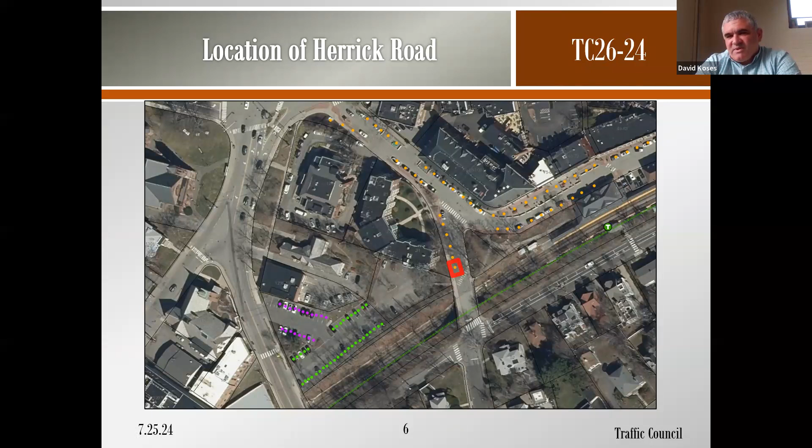The reason for its removal is a new building, which is almost complete and close to being ready to open. This is the building right here. You can see on this plan a driveway that now comes out to Herrick Road at the location where we have one parking meter located at that spot.

This is the location we're talking about. The driveway would be coming out this way from the construction site through here, and then exiting right here in this spot. That's where parking meter number 1413 is located, and we would need to remove that meter.

We did receive a letter from the fire department. In their letter, they write that as stated in the request filed with the council by Councilor Danberg, the Fire Prevention Bureau has determined in the interest of public safety that vehicular access for emergency vehicles from Herrick Road is a necessity if the building is to be occupied. To that end, such access cannot be achieved without the removal of one metered parking space on Herrick Road to provide the required curb cut opening. So that's the reason for the removal of the meter.

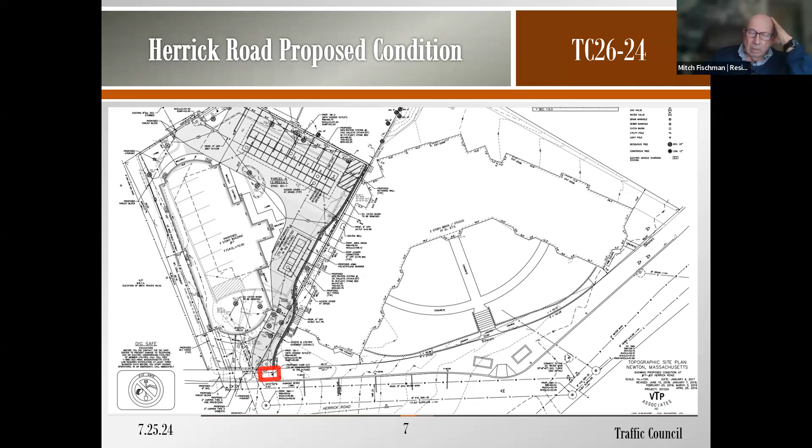And the curb cut—that's all been designed and approved, and all we're doing is getting rid of the parking space? Correct. Mitch, the site plan was approved as part of the special permit process. This project wended its way through city council over several iterations over a decade. I think you might have actually served at the time one of the earlier versions was approved. But the site plan approved the curb cut.

Of course, we would have to go through the DPW and engineering to get the curb cut approved, but it's already been vetted through the special permit process.

So Terry, would it be the developer that would be removing the trees? I guess we would have to remove one of these two meters and keep the other one there. I don't know about the utility pole or the street lamp, if it needs to be removed as well. The new curb, removal of the curbing to create access—all that's going to be done by the developer, right?

That is correct. All costs associated with the curb cut would be borne by the developer. That's correct.

So we have no objection, David, from people in that corner building? I have not received any objections to this item. I mean, all we're responsible for at traffic council is to vote to remove one meter. We're not in charge of really voting on anything else.

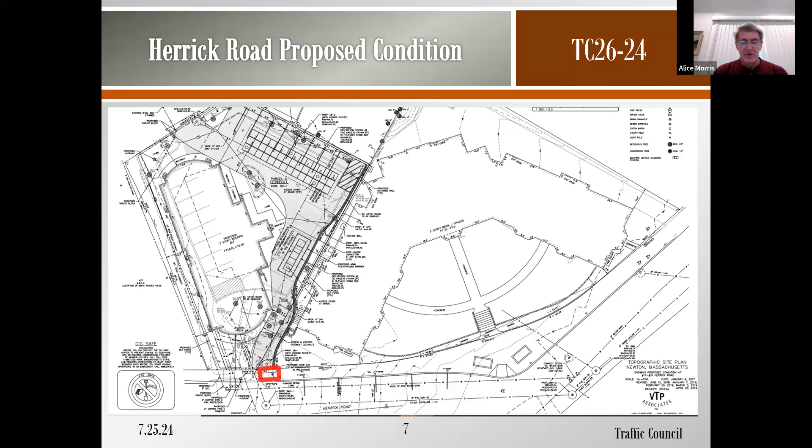I can't—I know that we had several visits with Deputy Chief Melendez at the site with the contractor as well. I can't speak to whether a tree would be removed. I do know that the reason the parking space is removed is because one can't get full access for a curb cut through that location without impeding the ability to park in that space.

Right, okay. Well, all we're really voting on is the metered parking space, so I think for our purposes, that's enough. It just is confusing as somebody who sits on land use and probably saw the petition come through.

Just not remembering the Herrick Road access and the grade involved, but could be my bad. Right, so at this point, all we're being asked to do is to remove this 1 meter. We're gonna end up possibly with a parking space pretty close to where the driveway is. We might have to deal with that down the road. I'm not sure, but all I know is that this item was docketed, and we have been asked by the fire department to remove 1 parking meter.

Okay, are there any other comments? All right, then I already made a motion to approve TPR 943. Let me just see if we are all.

Okay, so all 5 traffic council members are here. Would you please call the roll, Danielle? Mr. Koses, Aye. Mr. Cod, Aye. Captain Devine, Aye. Mr. Fischman, Aye. Councilor Downs, Aye. Okay, that's approved 5-0, TPR 943.

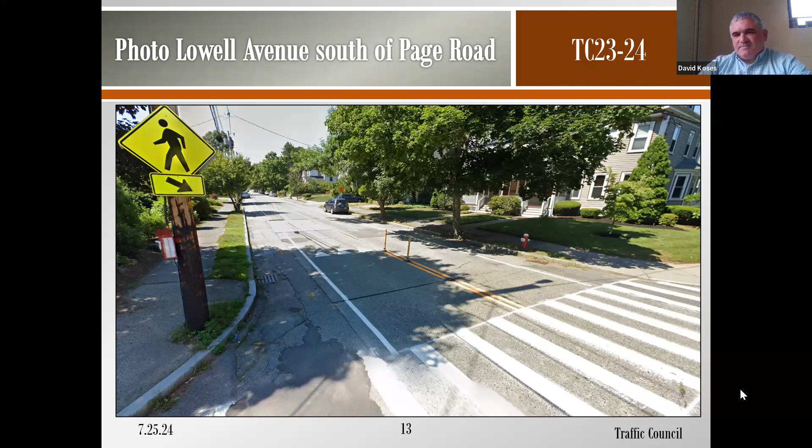I'm not sure when it would be heard again. We do have a backlog of other items waiting to be heard, and there's no meeting in August, so I would think maybe later in the fall or winter we'll hear this again. All right, thank you all very much, and we're going to move on to our next item.

So our next item is TC 2724. This is Councilors Gentile and Krinsman requesting to discuss and potentially take action to change the parking regulations on the segment of Woodbine Street to the north of Commonwealth Avenue, possibly by adding it into the Auburndale Village Parking District.

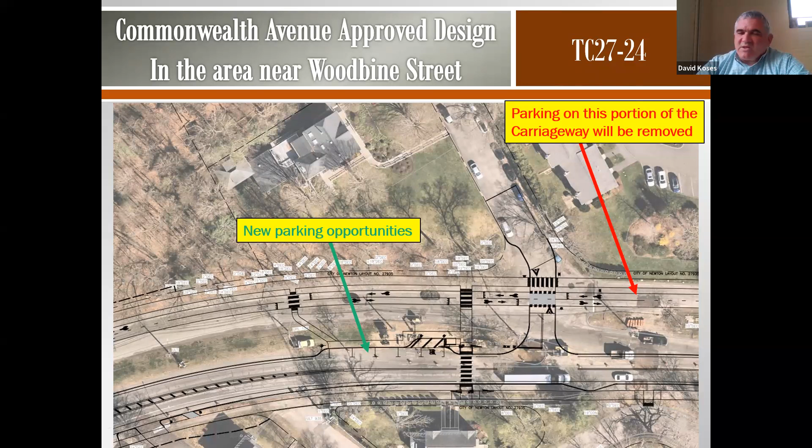So the issue becomes that this veterinary hospital is very busy, there's a lot of employees there, the parking lot cannot accommodate all the employees and patients. For a very long time, they were depending on overflow parking in the carriageway right here, which is voted to be removed. The design's already been approved. And so we were trying to think of how to provide some relief to the veterinary hospital.

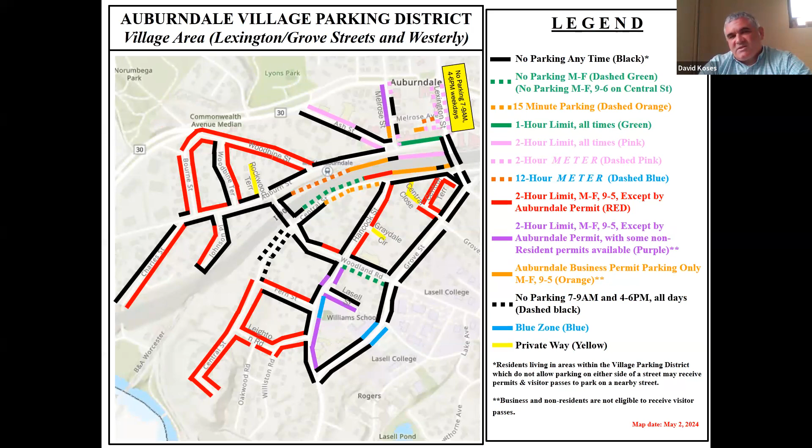The traffic bureau is in charge of determining how many permits are issued to different businesses, it's not an unlimited supply. And so we thought that a good way to help out the veterinary hospital would be to extend the Auburndale Village Parking District a little bit, and we're allowed to expand to any street that's contiguous. So we do have, luckily in this case, we are contiguous. We are able to expand the Auburndale Village Parking District to create what we, I guess we would call this phase 1, at least to see how it goes, to create a small zone on a portion of the dead end.

That would become another Auburndale business parking, permit parking zone, about 5 spaces. This is only on the west side of that section of Woodbine Street, and it's only a portion of the west side, just from Commonwealth Avenue to a staircase. There's a staircase that leads up to the hospital. It would not make any changes to the remainder of that dead end section of Woodbine Street, but it would create a reserved zone.

So other people would not be able to park there, only employees. It would hopefully open up some spaces within their parking lot to their patients. Other people who might park there would be people going on a walk in the woods right up there, and there are other places they would be able to park. So this seems like a modest change to help out the veterinary hospital, because some of the parking they had been depending on is now planned to be removed.

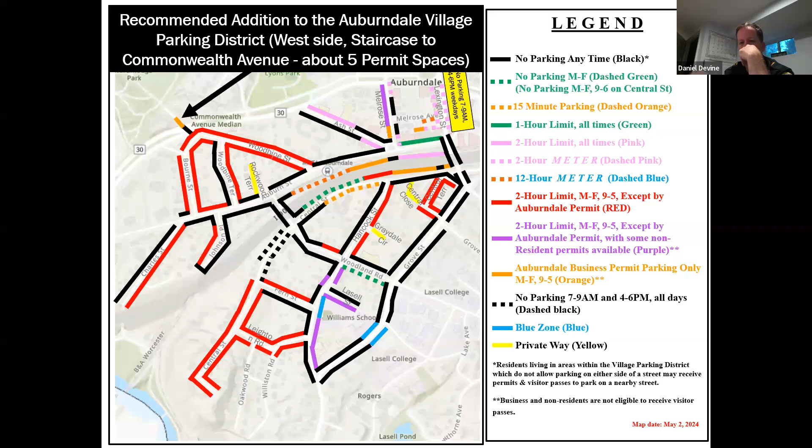So, unless there's any other comments, I'll go ahead and make the motion to approve all this language, to be able to create this little zone of Auburndale business permits. That would be TPR - let's see, I guess this would be 944. So I will make that motion to approve TPR 944 for TC 2724.

We do have the 20-day appeals period, so if this is approved we'd have to wait until mid-August. I'm assuming there'll be no appeal for this change. After August 14th, you will see the signs installed on this little section. I'll work with our traffic superintendent to determine exactly where the sign should be posted between the staircase and right now the carriageway.

It'll change with the reconstruction - when it's reconstructed, that road will continue all the way down to the main line. But after the signs are posted in mid-August, that would be your cue to go to the traffic bureau, show proof that the employees work there, bring your $25 for each permit, and see how many permits will be issued.

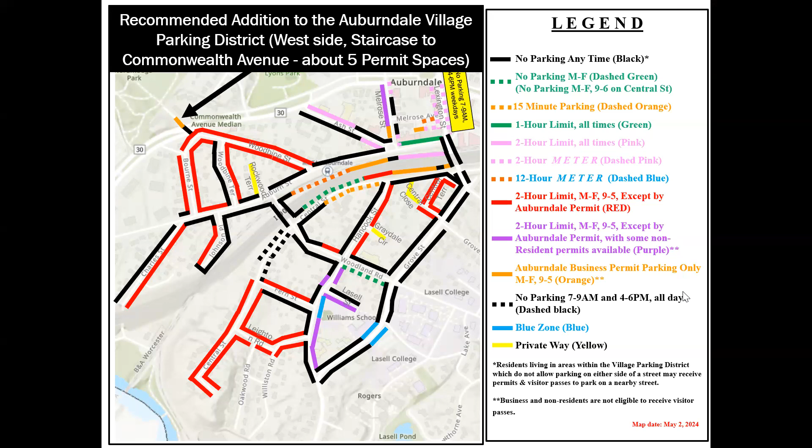Mr. Koses, aye. Mr. Cod, aye. Captain Devine, aye. Mr. Fishman, aye. And Counselor Downs, aye. That's approved 5-0, TPR 944. Thank you.

Okay, good. So our next item then is TC 2824. David Koses, Traffic Council Chair, requesting to change the parking regulations listed in section TPR 194, time limits in municipal off-street parking lots, as NewMo vehicles will no longer require any reserved parking spaces in the Lexington Street public parking lot in Auburndale. So here we are with the same map - I guess it's no longer the current Auburndale Village Parking District map because we just added another section. But this is the area we'll be talking about now, the Lexington Street lot.

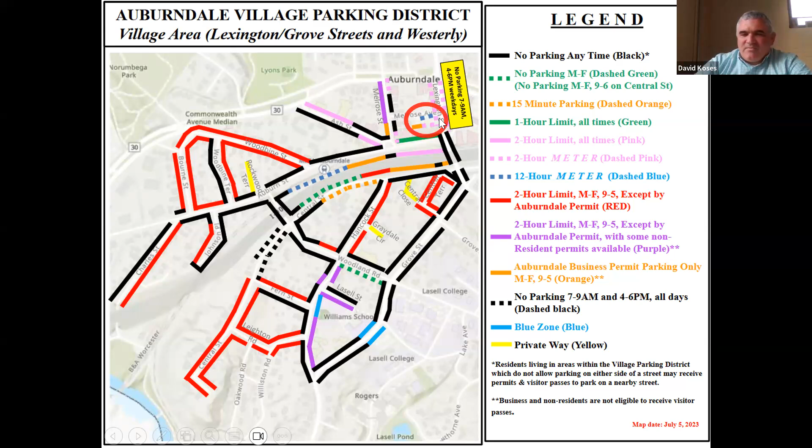So a little bit of background. Some of you might remember a little over a year ago, Traffic Council voted to make some changes in that lot because we needed to consolidate the location of where all the pneumo vehicles were parking. A lot of them had been parking at 150 Jackson, where the new Lincoln-Eliot School fence went up. They were no longer able to park there. Also, they were EV vehicles, many of them. And so we voted to consolidate all of the pneumo vehicles in the Lexington Street lot. So we made some changes to the Lexington Street lot.

And that lasted about a year, but now we find that pneumo is no longer going to be operating. I think they might not be operating anymore. Right around now is the end of their contract, and we'll be moving to GoGo instead, GoGo Newton, which is a different model of service delivery. So GoGo Newton does not have specific vehicles. There's no need to have any reserved parking spaces anymore. So the lot can be reconfigured again. We don't need those spaces anymore reserved for pneumo vehicles.

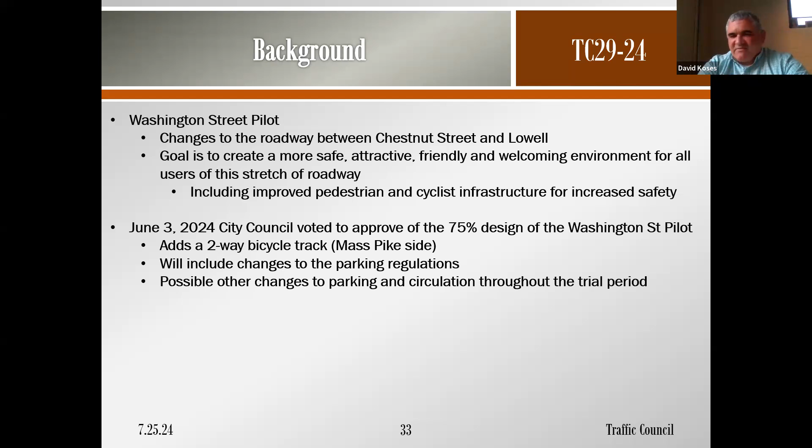We're not really, I don't think it's necessary to talk about the whole pilot. I don't even have slides showing the pilot. It's already been approved, and it's really up to us now to vote to hold a trial along this corridor.

This is the Washington Street pilot geographic limits from West Newton over to Newtonville, to allow the pilot to move forward. We know that we need to move the location of the parking spaces, the meters, and various changes along the corridor. We need to be able to be flexible to make additional changes as needed.

It is a pilot. We're expecting that we might need to make some changes. So we're not looking to change all language, to write up and vote on permanent changes to our traffic and parking regulations right now. We're just looking to be able to move forward with the pilot and to be able to be nimble and make additional changes. So what we're looking for is just a vote from Traffic Council to hold this item.

This will be like a long-term trial. So as long as we're holding this item, we'll be able to make all sorts of changes to the parking locations, where the loading zones are, where the meters are, all this, along this whole corridor. So that is what this item is. That's my recommendation, a simple vote to hold.

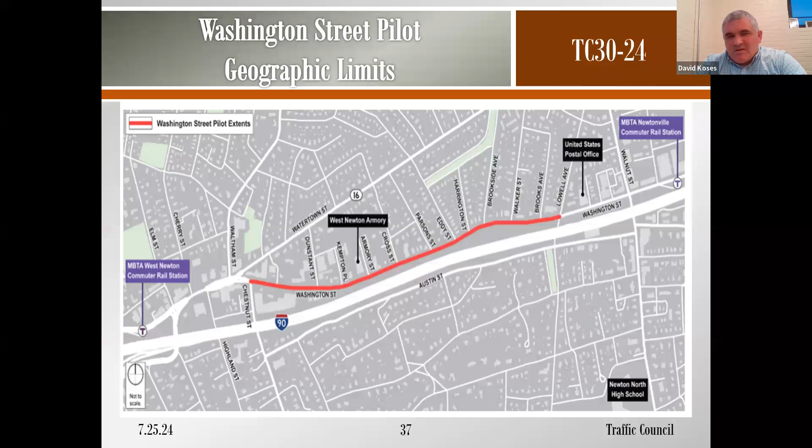Okay, thank you. So we already opened up TC 3024. This is a related item along the same geographic corridor. This is a request to hold this item while we ask MassDOT to reduce the speed limit within the project limits, right?

So right now it's a 4-lane road. We can see here that it's a 35-mile-an-hour speed limit between Chestnut Street and Lowell Avenue and beyond, right? So when the pilot goes in, it's going to have a different feel. It's going to be a different street. It's not going to be a 4-lane road. It's not going to be necessarily safe to be traveling at 35 miles an hour.

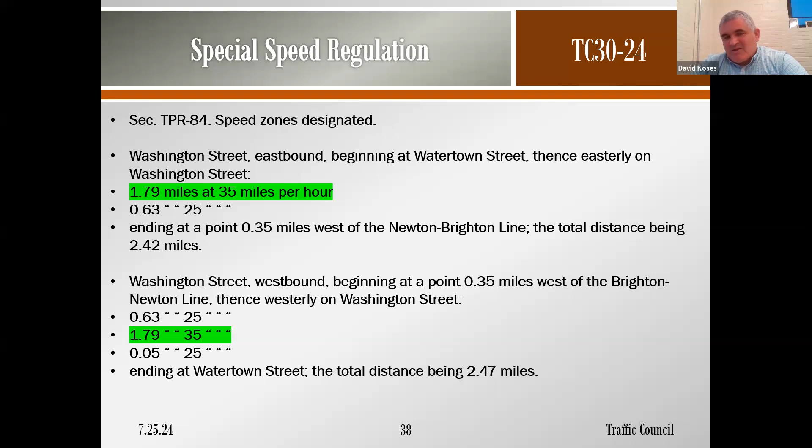We're not going to be wanting people to travel at 35 miles an hour. We're going to want them to travel slower. So this item is a motion to hold, to ask MassDOT to rescind the regulatory 35-mile-an-hour speed limit so that it becomes 25 mile an hour along a portion of this 1.79 mile stretch. So if we do vote to hold, we would be asking MassDOT to rescind the special speed regulation, thereby making it 25 miles an hour at the time that the pilot goes into effect. So this would be, again, holding an item.

Any thoughts, any comments? I'll make a motion to hold. David, sure, just a question - we're going to prepare the request and send it to them, but we don't vote to approve that request as part of this? I mean, isn't that sort of what we're doing? Right, but we can't make a change to our traffic and parking regulations, a permanent change, until we get their approval. So, similar to other items, we're holding it, we're waiting for their approval. Once we get their approval, it'll come back and we'll vote for the permanent change.

Yeah, but I think in a way, you're kind of not saying it, but we're kind of requesting to make the change. In other words, by saying we're going to hold this to make the change, we're not just holding the item and waiting to make the change later - we're hoping to make that change. So we're in effect approving the request, correct? I think we're approving the Public Works Division to prepare the documentation required and send it to MassDOT through the clerk's office to rescind the previously approved special speed regulation. Okay, I think that basically says the same thing, but yeah. Thanks, okay, thank you.

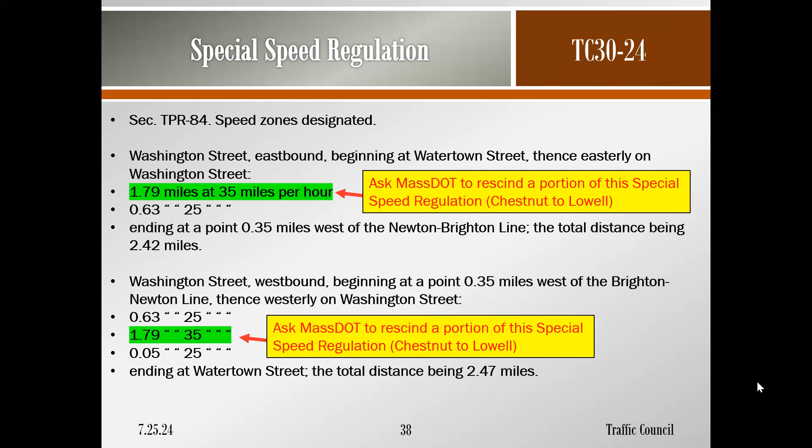Let me just see, do we have anyone from the school department? No. No, okay. All right, so the next two items relate to the school department.

Okay, so TC 3124. Traffic Bureau Captain Daniel Devine, DPW Commissioner James McGonagle, Director of Planning Barney Heath, Project Management and Sustainability Stephanie Gilman. Is that the right title? Maybe not. But this is including Stephanie Gilman from the school department and Co-Director of Sustainability William Ferguson, requesting a trial to modify parking regulations on streets near the Education Center in order to facilitate the solar canopy project in the Education Center parking lot. Changes to parking regulations may be needed for several months on certain streets within a 5 to 6 minute walk of the Education Center. Once the project is complete, parking regulations will revert back to the original parking regulations as listed in Newton's traffic and parking regulations.

Okay, so we heard recently that there is a solar canopy project planned in the Ed Center parking lot, similar to the solar canopy projects that we've seen in different places around the city, in the library lot, Newton North, for example. So in this case, we recognize that there will be a loss of more than 150 spaces temporarily while the construction happens.

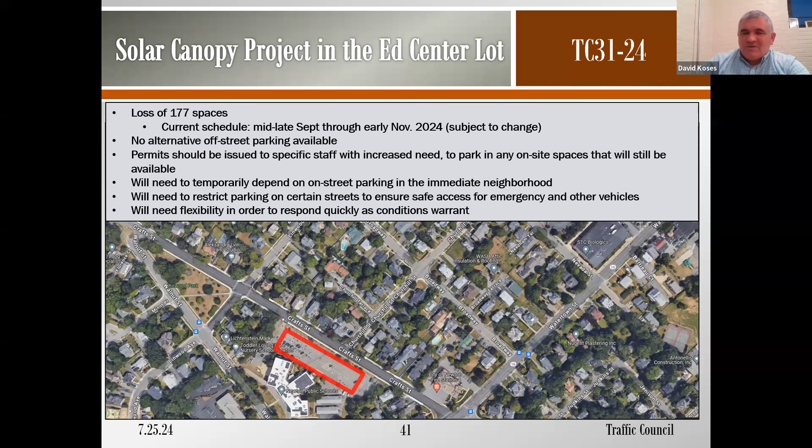So this slide, I wasn't even sure if I was going to show this slide. Maybe let's not talk about it very much. It's really an internal slide for our staff in the transportation division to start to think about some of the changes we might need to make to the local streets in the area. I guess I'll highlight one thing that I'll call the school department later and talk through with them, that we think there'll be some spaces left in the Ed Center lot itself.

Maybe only 20 spaces. So the Ed Center might think about whether it makes sense to issue permits to some of their staff who might need to park closer, to be able to park in the remaining spaces during the construction process by permit. They might want to issue permits. Some of these other streets, whatever is shown in black font, we might need to change the parking regulations so that you're only parking on one side of the street, so that we don't have both sides of the street parked up and cause problems for emergency vehicles to get through.

We might need to change some of the restrictions to allow parking on some of the streets where it's currently not allowed right now. On Linwood Avenue, for instance, right here, I believe you need a permit to be able to park there. So that might need to change along a portion of Linwood Avenue.

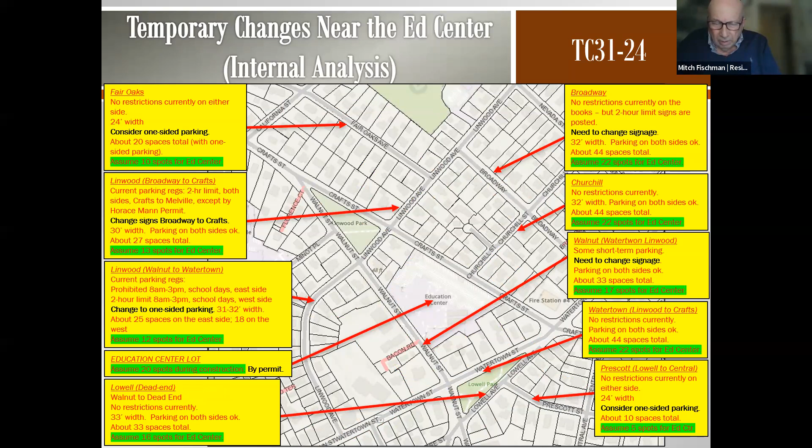I guess the question is, there are some streets maybe that are too narrow or perhaps have parking restrictions now and you don't want to add cars. So I guess the question really is, how do you get people engaged enough so they realize it's not forever and whatever happens is for the good of the city, and that you've been fair in selecting which streets perhaps get heavier use than others - or maybe it's everything within that circle. I mean, when you say internal, I assume you're saying if you draw the circle, it accounts for the kind of number of spaces that you really need to show coverage, right?

I think that I did this just to try to show that we have enough spaces in the neighborhood, and now we're assuming half of the street capacity could be available to the school, to the Ed Center, half to the residents.

It's not going to be exactly that much. We just wanted to make sure there was capacity nearby, and that we could quickly respond to a problem we find out about. If we find out that cars can't get through Churchill or some street nearby, we'd be able to respond. Some of them we might know right away, that we're going to need to put some restrictions in. And we're not talking about permanent signs, we're talking about paper signs that we see all over the city for all different kinds of reasons.

Yeah, I understand. It seems to me it's not even an option, you have to do it. Making sure the contractor is not going to be out there forever, and that there's enough information for the local representatives to be able to answer questions. We just want to make sure that everything is safe.

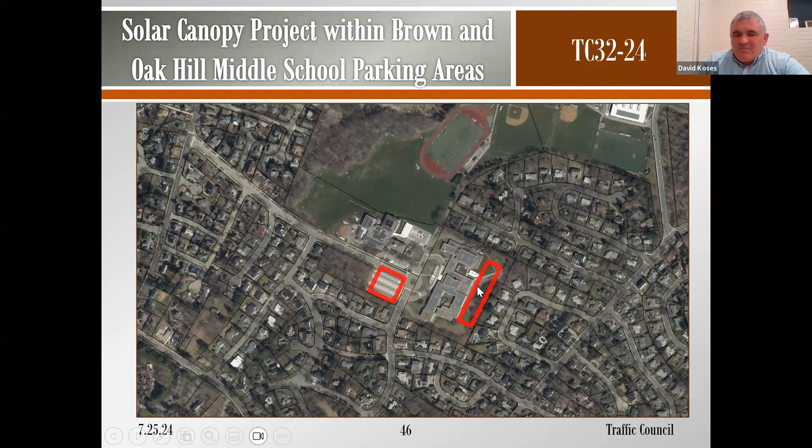We don't know when this project is going to take place. It could be starting as in September for a couple of months, we don't know. If it does happen during the school year, we know that vehicles will again be shifted out of these parking areas onto the neighborhood streets.

So we did a similar map internally again, which we don't really need to show. But the point is that some vehicles will still probably be able to park in the main parking lot. Maybe that should be managed in some way by the school department or by the two middle schools for staff who really need to park close. We know that we need to find about 150 spaces in the neighborhood.

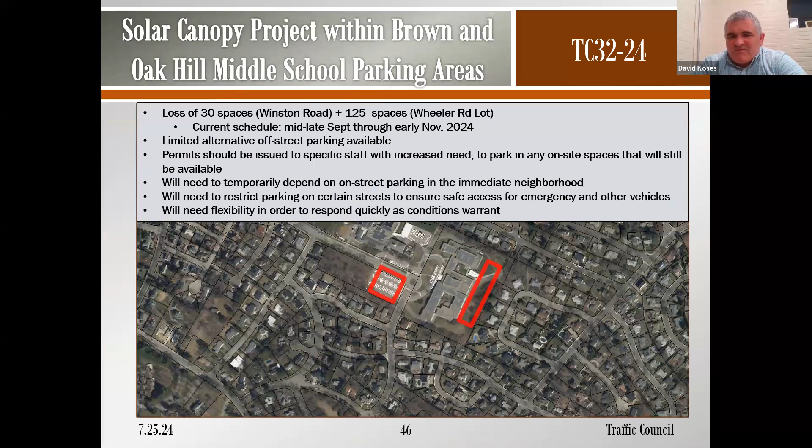So a lot of vehicles could park on Wheeler Road. There's a lot of parking available on both sides. So we're assuming a certain number of cars would park there, in addition to other cars that are not related to the school at all, and then on different streets on all sides of the schools.

This calculates that there is enough capacity within a couple minutes' walk of the schools, but many of these streets are pretty narrow, and we would not like to see all-day parking, let's say, on Voss Terrace or Sharpe Road. We would not want end-to-end parking on both sides of some of these streets.

So again, it's the same thing as before, to give DPW, along with the schools and the police department, the authority to quickly respond by changing or posting temporary parking regulations on any of these streets, as needed.

So adding it all up, there is a lot of parking. Of course, what's probably going to happen is Wheeler Road will be completely filled up. Maybe there'll be more than 27 cars parked on Wheeler Road related to the schools, and less on some of the other streets. But we don't really know exactly.

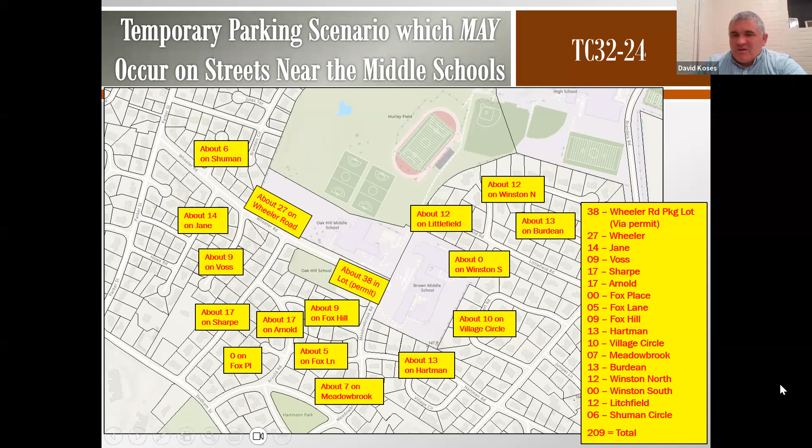Okay, all right. So any other comments? I'll make a motion to hold this item as well.

If we find out they're going to be doing the construction next summer, there's nothing we need to do, right? So there might be nothing we need to do if it happens in the summer, and we would just come back to traffic council and get rid of this item. So it all really depends on what happens. But we just wanted to be prepared.